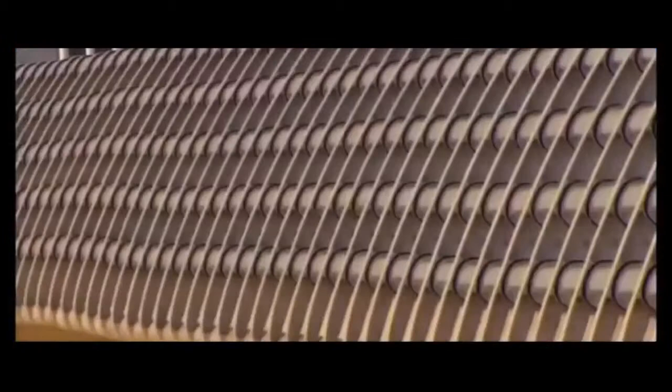This is the Millau Viaduct, the tallest bridge in the world. Its highest tower stretches a staggering 343 meters. So high, the bridge glides above the clouds. But this is a megastructure they said couldn't be built. When I've shown first the drawing of this bridge, they really thought I was crazy.

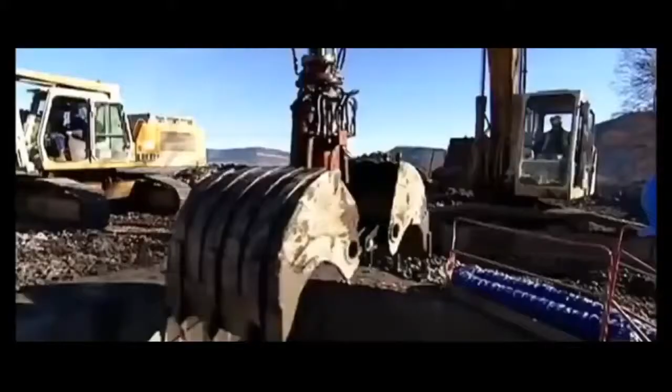The team attempting to build this amazing freeway in the sky had to survive landslides, fight winds gusting at 130 kilometers an hour, and weather massive storms as the bridge simply hung in the balance. It's a bridge that pushes the boundaries of engineering to the limits, and then beyond.

Imagine building a series of Eiffel Towers, then slinging a 4-lane highway between them, all the way across one of the deepest valleys in France. Impossible though it sounds, that pretty much describes the building of the Millau Viaduct.

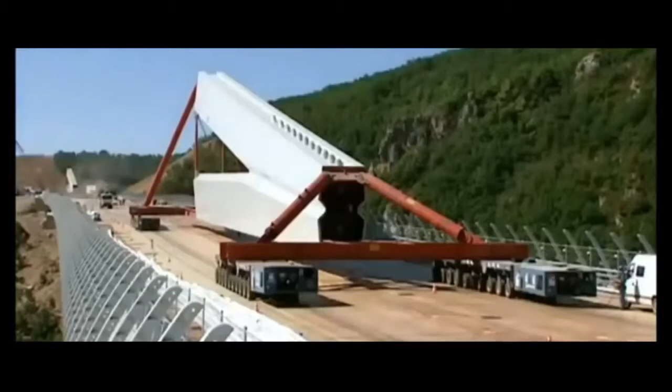From the start, the construction team faced 3 daunting challenges. 1. Build the tallest bridge piers in the world. 2. Put a 36,000-ton freeway on top of them. And 3. Erect 7 steel pylons, each weighing 700 tons. And what's more, they had to do this hundreds of meters above solid ground. So high that if you were on top of the Eiffel Tower, you'd still be looking up at this awesome bridge.

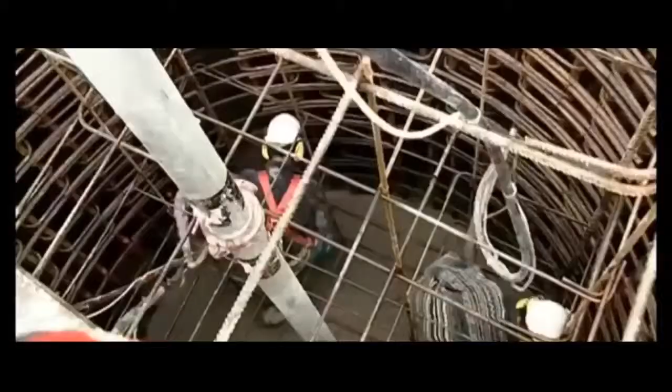October 2001, the team break ground. They're required to build a bridge that'll last for 120 years. And to win the contract, the teams promised to build it in record time, less than 4 years. By comparison, the world's longest suspension bridge, the Akashi Kaikyo in Japan, took a full 10 years to build. To up the ante, any delay will cost them $30,000 a day in penalties.

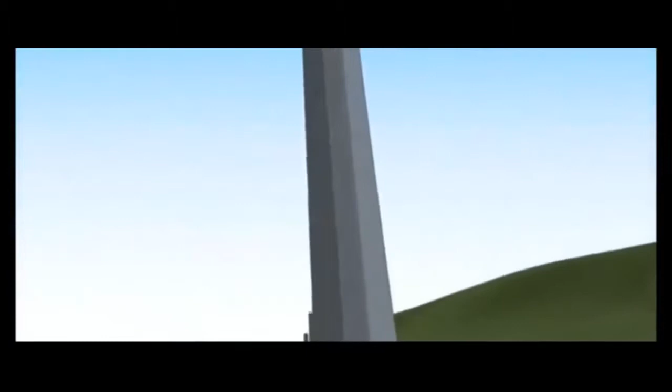There are 7 piers that are numbered from the northern end of the valley. Number 1 will pose problems because of the steep slope. Number 2 will be the biggest challenge since it's the tallest. Crossing the river, number 3 is not much shorter. Then 4, 5, 6, and 7 climb the gentler slope to the south.

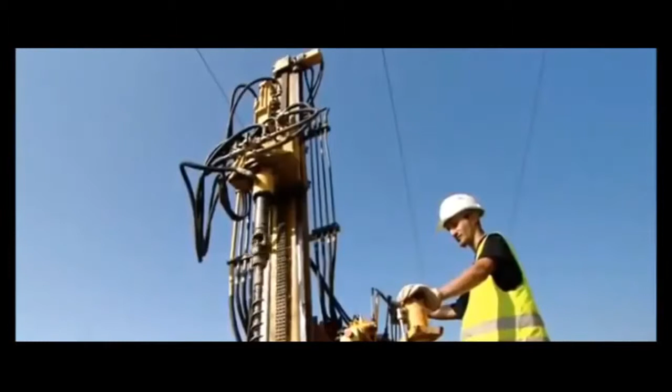To begin, the team had to bury the foundations deep in the bedrock in order to support the enormous weight the bridge will place on them. But the forces of nature were stacked against them. Geologists have warned of the risks posed by the region's fractured limestone. The rock is full of cavities that are essential to the local cheese economy. These cave systems, close to Millau, are home to a unique bacteria responsible for the blue mold in the world-famous Roquefort cheese. But what's perfect for cheese could be disastrous for a megastructure.

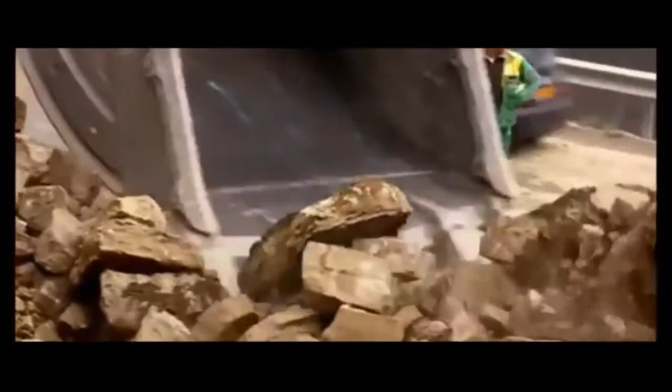The geologist's diagnosis spelt one thing: landslides. This kind of catastrophe could jeopardize the entire project. Despite the warnings, building went ahead as planned. Then, well into construction, as predicted, a dramatic storm causes a landslide. 4,000 cubic meters of rock collapse around Pier 1. Fortunately, the fallen rock doesn't damage the pier, but the warning is clear. They're forced to divert precious manpower and equipment to stabilize the slope and prevent a repeat collapse.

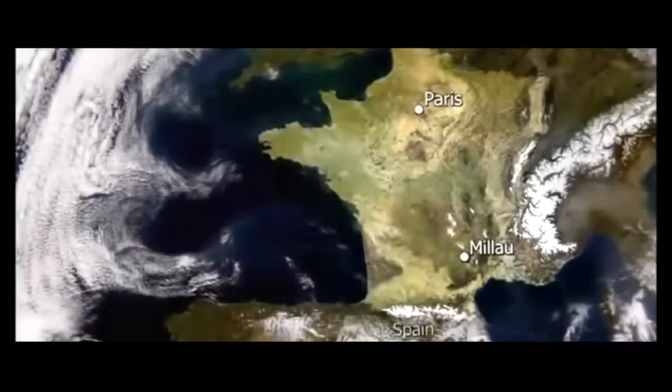So if the area is prone to landslides, why did they build the world's tallest bridge here in the first place? The answer is simple. In the 1980s, France built a freeway linking Paris directly with Spain. This major artery headed south across the French countryside, while from the Mediterranean, the freeway headed north, until they both hit one of the deepest valleys in France and stopped dead. Welcome to Millau, France's least favorite bottleneck.

The town of Millau is in the mountainous region of the Massif Central, one of the most tranquil parts of France. But in summer, this poor medieval town suffered traffic hell. The locals couldn't take it anymore. Neither could their mayor. It was terrible for our reputation. When you hear every day on the television and radio, avoid Millau, there's a traffic backup, a 5-hour wait in Millau.

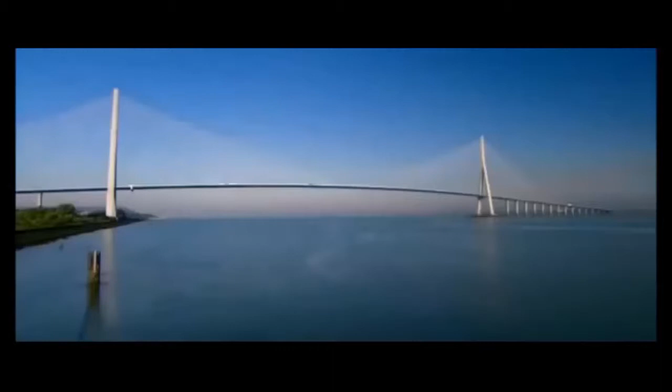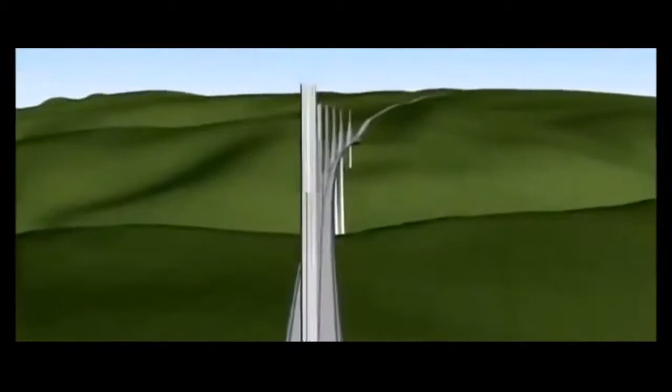The Millau Bridge would not only be the world's tallest, it would be unlike any bridge ever constructed. When I first showed the drawing of this bridge to the concerned authorities, they really thought I was crazy. Virlogeux's Normandy Bridge has 2 sets of cables supporting the deck. But he wanted to up the stakes for Millau by losing 1 row of cables, so the remaining line would be forced to do twice the work.

More dramatically, the 2.5-kilometer Millau Bridge, instead of having a single main span, needed a whole series of piers to support it across the valley. No bridge builders had ever attempted a multiple-span, single-line cable-stay bridge on this scale before.

The French authorities had a problem. Nervous about Virlogeux's groundbreaking scheme, they held a competition inviting other engineers and architects to compete with different designs. The winner, Lord Norman Foster, is one of the world's superstar architects. In Hong Kong, he built the world's largest airport terminal. In Barcelona, offices literally hang from a mast on his communications tower. This is a man who regularly contemplates the impossible and delivers.

You know, it's the challenges, and it's one challenge on top of another, on top of another. And with Millau, one of the biggest challenges was making it fit into the landscape, given it's just down the road from the famous Gorges du Tarn, France's equivalent of the Grand Canyon. How do you make something which has to be so immensely strong against the forces of nature look very gentle, very delicate? How do you weave something on that scale into the most unbelievable landscape?

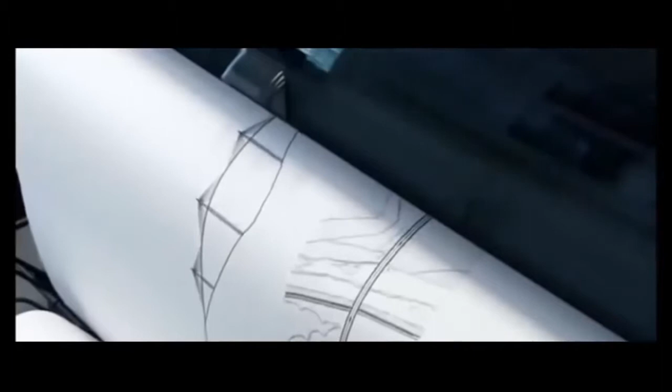Ironically, Foster's answer was to take Virlogeux's pioneering scheme, then push it one stage further. He turned an elegant piece of engineering into a delicate work of art by boldly cutting out 2 of the 9 original piers and seriously slimming down the remaining piers and road deck. Foster wanted the bridge to appear as delicate as a butterfly, but this butterfly has to support the weight of 5 Eiffel Towers in gale-force winds hundreds of meters above the River Tarn. Getting the design wrong would be a disaster.

Then, with Millau still on the drawing board, Foster's record as a bridge builder suffered a major setback. His Millennium Bridge in London is actually another record-breaking structure, the lowest profile suspension bridge in the world. But when this footbridge opened to the public in June 2000, it was a public relations disaster. Crowds walking over it set up a resonant frequency, and the bridge began to sway. As people adjusted their step to the small initial wobble, the effect was magnified.

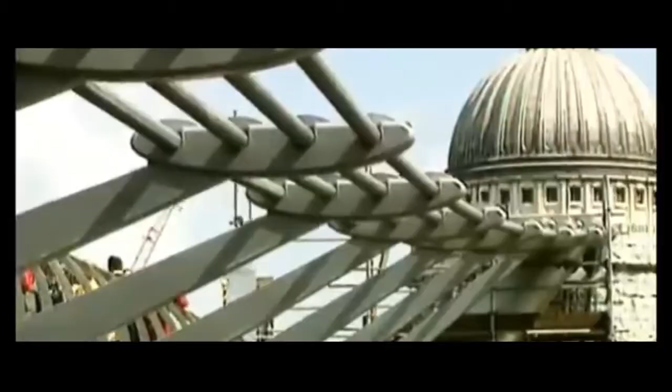Though it didn't threaten the structure, the swinging motion became so dramatic, the authorities closed the bridge for a refit that took 1.5 years and ended up costing over $8 million. It was a bad omen for the Millau Bridge, where construction was soon to begin. And at 15 times the height, a design flaw would be a catastrophe.

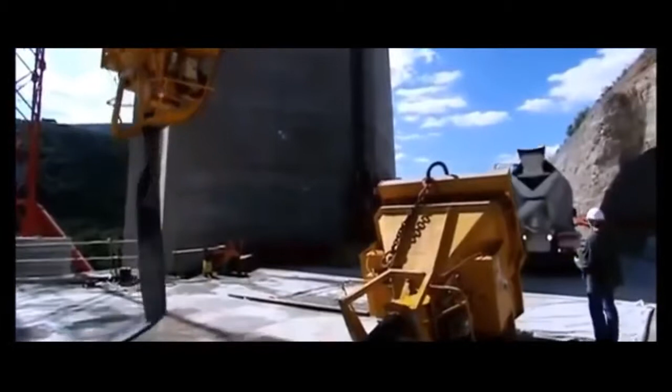December 2001, France's Millau Viaduct, the tallest bridge in the world, is under construction. Everything about this project is supersized. It'll need 200,000 tons of concrete, so much that the team have to build a concrete factory on site. But there's nothing straightforward about this concrete. The formula must be just right. It needs structural strength to support the massive loads it'll have to bear. But it can't set too quickly, as it has to be hoisted into position and poured hundreds of meters in the air. And it needs to be just the right color to suit Norman Foster's vision.

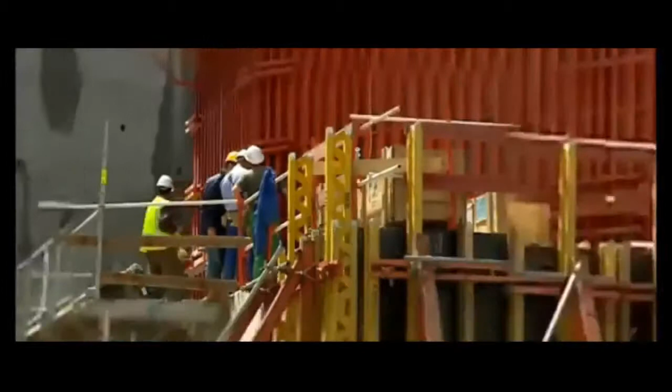In fact, the architect's vision has created a headache for the construction team. He's designed each pier as a complicated geometric shape, tapering the entire way up with vertical grooves set into them to create shadows. But what's just a line on paper for the architect was a major challenge to build. The enormous piers are built step by step by pouring concrete into a temporary mold.

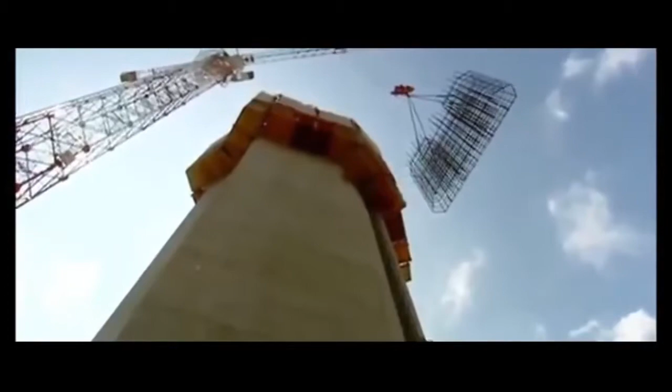To give the required strength, the molds are filled with a frame of steel reinforcing bars. In total, 16,000 tons of these steel bars are hoisted into place and secured. Laid end to end, they'd stretch the 4,000 kilometers from Millau all the way to Central Africa.

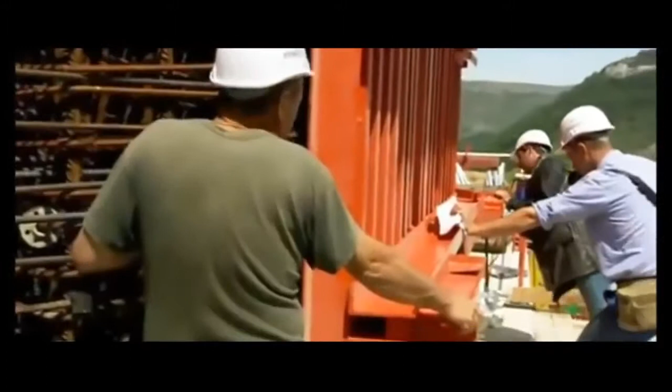The shape of each pier is seriously complicated. As a result, each time they remove the sections of red steel shuttering, they have to change the shape of the mold to fit the profile of the next 4-meter section. Manhandling these steel panels weighing up to 15 tons apiece is no picnic. And with the combined height of the 7 piers totaling well over a kilometer, they have to change the shape of the mold over 250 times.

Every 3 days, each team on each pier went through this whole cycle. Then they repeated the process. But it was a race against time, with a permanent threat of delay. Keeping the entire build on time and to budget was the daunting responsibility of one man, Jean-Pierre Martin.

If instead of 3 days we took 4, imagine that multiplied by the number of castings. We'd end up with a 3 or 6 month delay. With a penalty of nearly $1 million a month, this isn't something Martin wanted to contemplate. And this schedule wasn't his only headache.

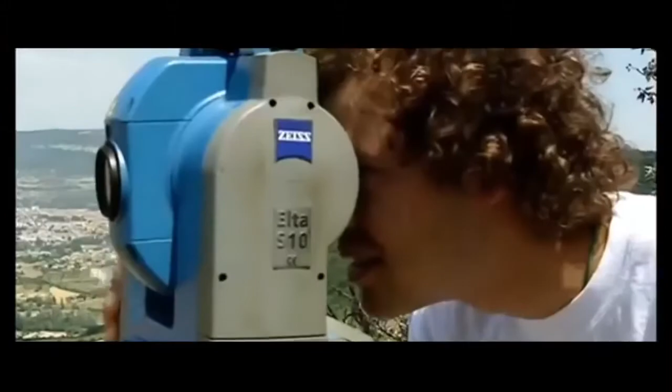You have to be pinpoint accurate when you're building the tallest bridge piers in the world. Get it wrong, and the bridge simply won't fit together. Just 10 centimeters out, about a hand's width on each 4-meter section, and the tallest pier could be 6 meters off at the top, the width of a jumbo jet fuselage.

Each team was aiming for a specific point in the sky. For Pier 2, this was exactly 245 meters above the ground, 546 meters from the north side, and 1,914 meters from the southern end. There was no room for error.

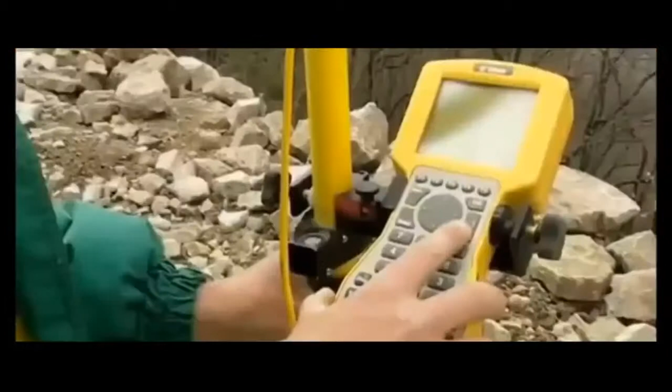The only chance they had to get it right was with GPS, accurate to within 4 millimeters. Using signals from multiple satellites, the team could pinpoint their position and make sure they're on target for that critical point in the sky they needed to hit.

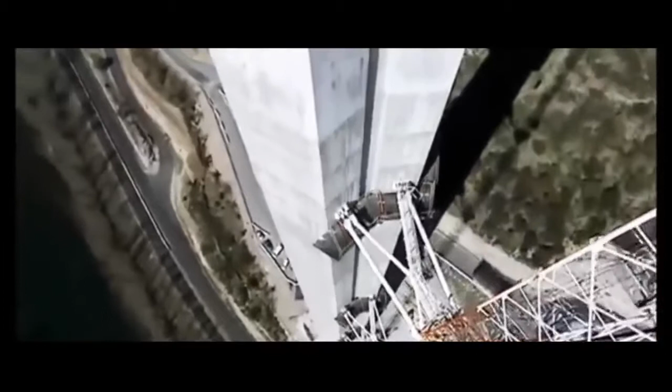Month after month, the piers climbed higher. Finally, by November 2003, they reached their full height. At 245 meters, Pier 2 becomes the highest bridge pier in the world. But is this record-breaking pillar where it's supposed to be? Amazingly, it's dead on target, to within 2 centimeters.

Champagne corks pop. It's time for a major celebration. Against all the odds, they were 1 month ahead of schedule, but the team couldn't afford to relax. The next stage of the project would be the most difficult part of the build.

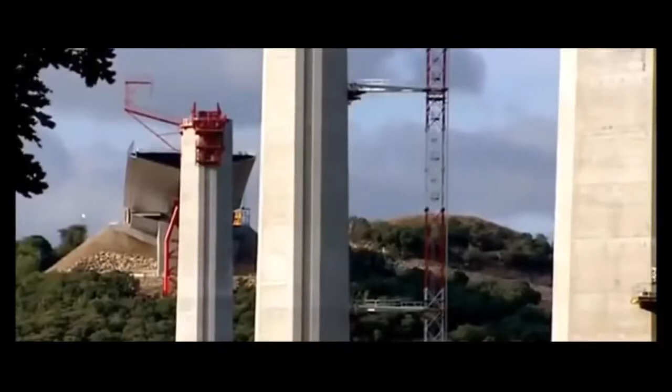Phase 2 of building the world's tallest bridge involved putting a 2.5-kilometer roadway weighing 36,000 tons on top of the piers, a full 270 meters above the River Tarn. Bridge builders know danger comes with the territory, but working at these heights can be lethal.

More than 34 died constructing New York's Brooklyn Bridge. 35 died in 1970 on the Westgate Bridge in Melbourne, Australia. And 1 year later, 13 workers were killed when the Koblenz Bridge in Germany collapsed into the Rhine.

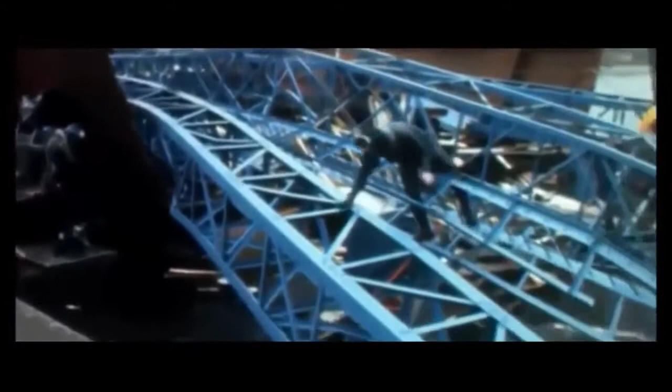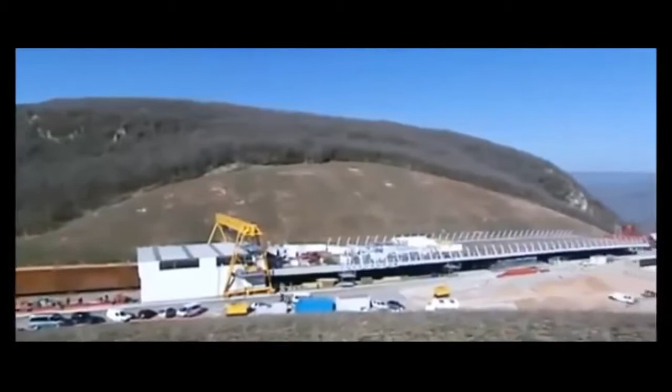With these fatalities in mind, the team decided to fabricate the entire road deck on the safety of solid ground. This meant building it in steel, which in theory would be much safer than lifting vast concrete sections hundreds of meters into position. There's only one problem with this plan. No one had ever put a road deck on piers anything like this height before, let alone over a 2.5-kilometer span.

In the end, only one steel manufacturer had the courage to take on this colossal challenge. Eiffel, the steel firm set up by the great French engineer. Eiffel built what was once the tallest bridge in the world, the Garabit Viaduct in southern France, before getting round to the framing for New York's Statue of Liberty and, of course, his signature tower in Paris.

But despite the company's experience, Eiffel's director, Marc Buonomo, knew he was taking a serious risk. It was a gamble for the company, because if there had been a mistake, if it hadn't worked, it would have been the whole company.

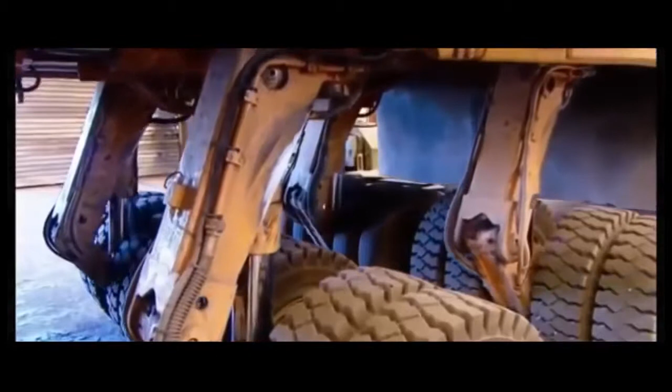They fabricated the massive sections that would make up the road deck in the company's steel factories. This immense jigsaw puzzle involved manufacturing 2,200 separate sections, weighing up to 90 tons, and some of them 22 meters long. Their accuracy is measured with a laser to within a fraction of a millimeter.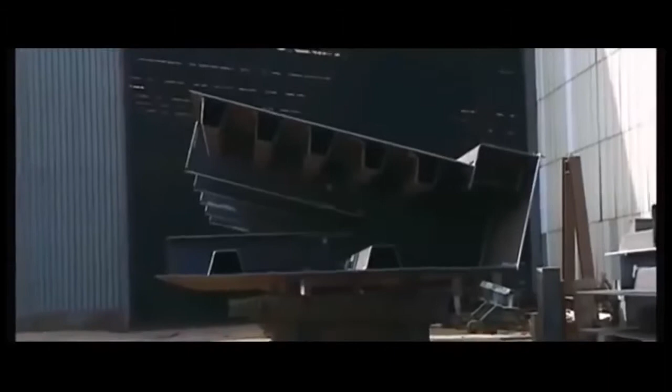The huge square tubes are the central spine that should make the deck rigid. The triangular side panels will be welded on either side to create the width for a 4-lane highway. To meet the punishing schedule, Buonomo automated the manufacturing with a 2-headed welding robot and a plasma cutting machine.

Each cutting pattern or template is programmed into the computer. Then the machine automatically blazes its way through the steel. The torch reaches a scorching 28,000 degrees centigrade. That's 5 times the temperature of the Earth's inner core.

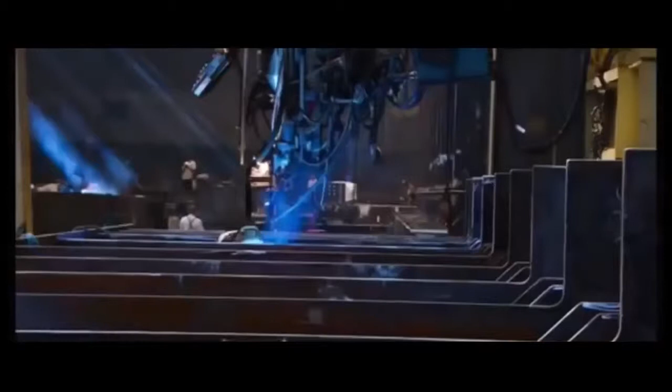But cutting and welding was the easy part. The hard part was getting these monster sections the hundreds of kilometers from the factories to Millau. The routes had to be planned with precision to avoid major damage. The police coordinated safety and clearances.

Even with that level of preparation, some obstacles felt as if they're cutting it just too close for comfort. And this was no one-off event. To build the viaduct took over 2,000 of these extraordinary road convoys.

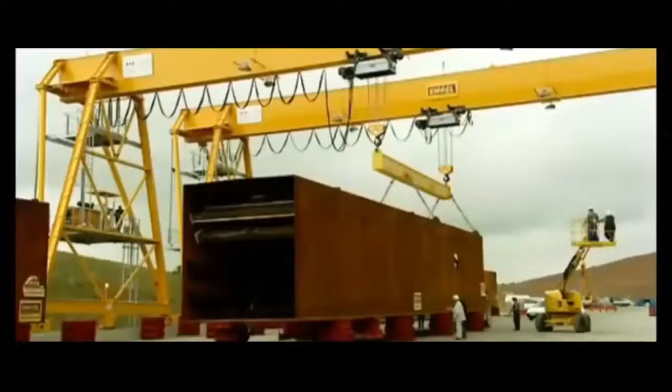The components arrived at assembly plants set up, one on either side of the valley. Here, the pieces of a massive jigsaw puzzle were welded together to form the 2 halves of the deck. But getting these 2 halves to span the valley on top of the world's tallest bridge piers would be a major challenge. They'd be the first team to put a road deck on a pier taller than an 80-story skyscraper.

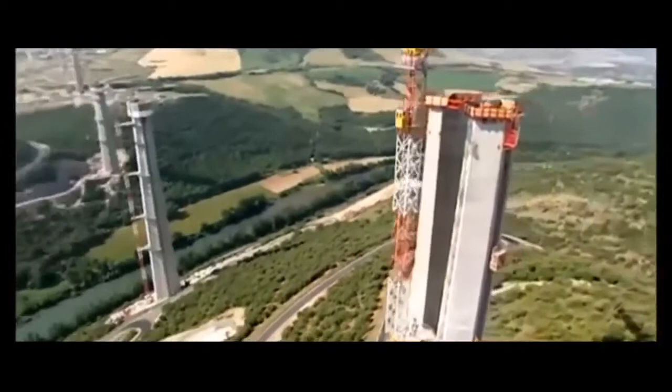And pushing bridge building beyond anything attempted before, they planned to slide the entire 2.5-kilometer road deck over in 2 colossal pieces. The bridge's chief engineer, Jean-Marie Cremer, was one of the few people who believed it could be done. All the engineers who know this method, who were in the know, didn't believe it was possible. If the team had got their calculations wrong, the entire structure could collapse into the valley.

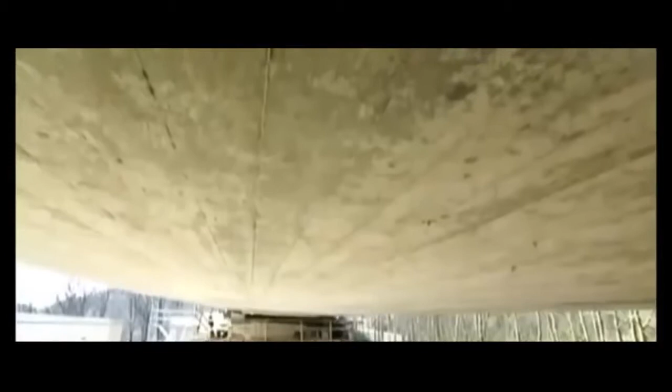We found a solution for the construction, which was to launch the bridge from the 2 sides. One part on the Larzac Plateau, one on the Rouge Plateau. And to push them from the 2 sides and to make them come and meet here above the River Tarn. Smaller bridges use a similar technique. A powerful set of hydraulic rams literally pumps the deck from one side to the other.

But Millau would be the longest launch ever attempted over the highest piers in the world, and the results could spell disaster. The deck is so slender, it would bend and collapse if it were pushed out over the 342-meter spans between each pier. The furthest anyone's previously managed is less than half that distance. The first part of the solution was simple. Fit a pylon so its cables support the front of the deck as it goes out over the valley. Then construct temporary steel support towers that halve the spans to a more manageable 171 meters.

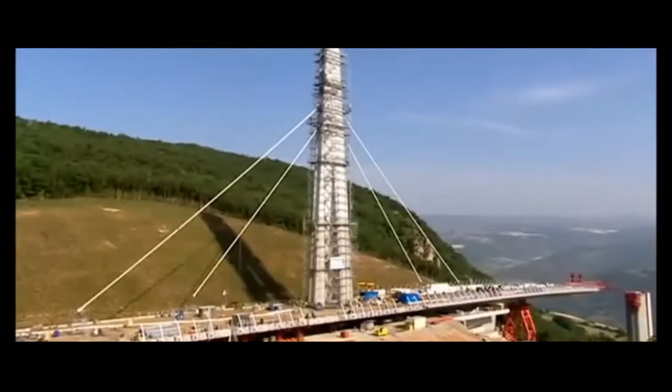These steel towers were a construction feat in themselves. The largest, over 170 meters high, is the tallest ever built, and they needed to carry a massive load. 7,000 tons as the leading edge of the deck, together with the first 90-meter pylon slide over. And simply pushing this enormous weight over the top of the vulnerable piers would bring them crashing to the ground. This was the nightmare scenario. If we'd done a conventional launch, we would have knocked the piers over like the pins in a bowling alley.

Someone needed to reinvent the way this type of bridge is built. And it's Marc Buonomo with Jean-Marie Cremer who came up with the breakthrough. The basic principle can be demonstrated with a heavy box and a wobbly table. With a normal launch, you knock over the piers. I want to advance the deck over the pier, but if I push the deck from here, I'd knock over the piers, because they're so tall. The idea is to install a launching system on top of the pier, and that way, if I push the deck, it has no effect on the stability of the piers, and the piers won't fall over.

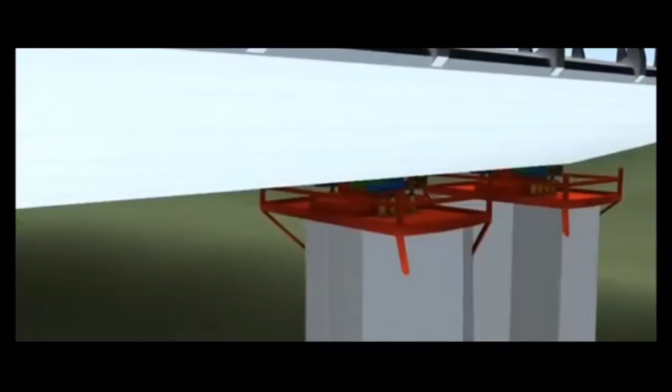The trick is to use a series of these launching systems to jack up the deck and inch it forward. Each system uses two wedge-shaped blocks under each side of the deck. The upper wedge is pulled forward by a hydraulic ram. It slides up the slope of the lower wedge at the same time, lifting the deck from its supports and advancing it 600 millimeters. The lower wedge then retracts, dropping the deck onto its supports. The upper wedge returns to its original position, and the whole cycle begins again.

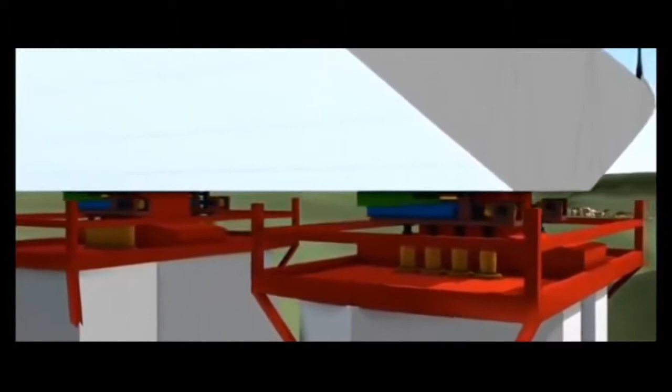4 of these clever devices are placed on each pier, all programmed to work at exactly the same time. The result is that together, they pick up the entire roadway and shunt it forward. But if one fails or gets out of step, it could spell disaster. The force could push the bridge piers apart till they collapse. When you're up there and you see Millau 300 meters below you, you ask yourself, was this a good idea? The future of the entire project was now hanging on a prototype, and it had never been tested.

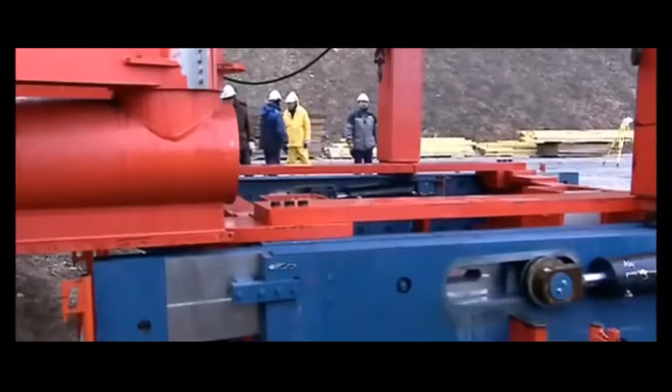It's the morning of February 26, 2003. Do or die day for the world's tallest bridge. Everything is about to be put to the test. The flexibility of the deck, the strength of the temporary piers, and critically, the pioneering hydraulic ram system. Even Buonomo, the man in charge of the launch, had his doubts. As it had never been done before, I have to tell you, I had fears that it wouldn't work.

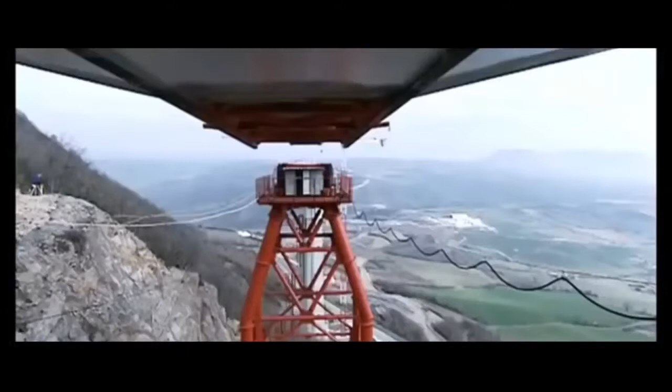The pumps kick in, the pistons start to push, and the deck begins its huge journey across the valley. The moment I heard the motors start, I put my finger on the deck, and I could feel my finger move. Every 4 minutes, the deck advanced 600 millimeters across the valley. Surveyors tracked its progress. But it was still a nail-biting time as they watched the unsupported deck crossing the void.

Eventually, the deck reached the safety of the first pier. 204 meters down, only 2,256 to go. The launching system seemed to be working as planned. The engineers were feeling optimistic.

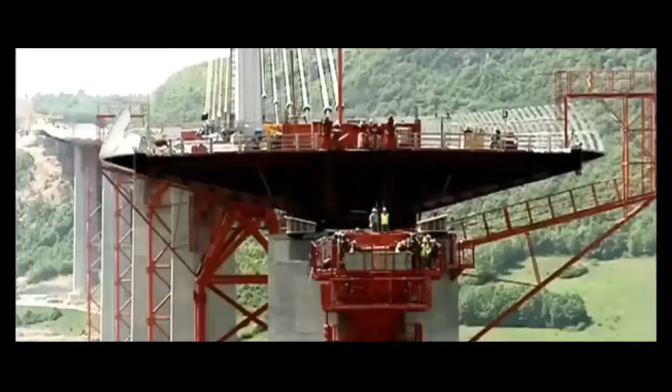But as the deck advances into space, it'll become more vulnerable to the wind, which can reach 130 kilometers an hour. Unfortunately, the road deck has the shape of an upside-down airplane wing, and the team's greatest fear is that this wing could simply take off.

The engineers kept a close eye on the wind and weather conditions. When they were satisfied there was a 3-day weather window and the wind wouldn't exceed 85 kilometers an hour, they'd give the construction team the go-ahead, and the deck launch could continue. The reason for this precaution is simple. Strong winds can literally tear a bridge apart.

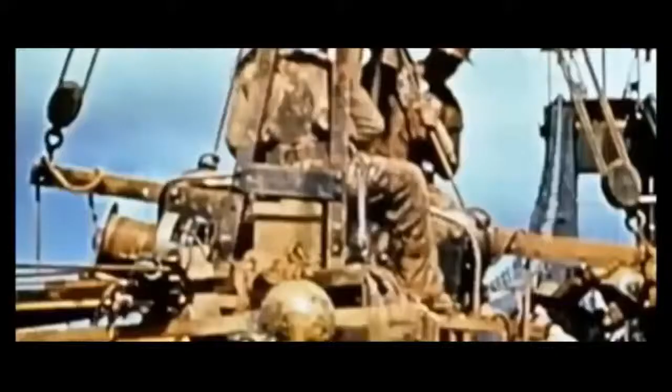In 1940, Washington State built a suspension bridge across the Tacoma Narrows in the US Northwest. It opened with a grand ceremony on July the 1st. But the celebrations were short-lived. The bridge had a major problem: the wind. Girders beneath the deck, designed to make the bridge rigid, actually blocked the wind, causing the roadway to ripple alarmingly. Locals soon dubbed it Galloping Gertie.

On the 7th of November, with the wind less than 70 kilometers an hour, the bridge begins to twist violently. At 11 a.m., time runs out for Galloping Gertie. The wind sends the bridge crashing into the river. Wind tunnel testing is now standard procedure as a direct result of Galloping Gertie.

For the Millau Bridge, they analyzed the wind in the Tarn Valley over 18 months, then recreated those conditions in the wind tunnel. Wind engineer Olivier Flamand was shocked by the results. The average wind speed was relatively low, but because there's such strong turbulence, it created very fast peak winds. The rugged terrain creates serious turbulence at the height of the road deck. Winds peak at 130 kilometers per hour. That's hurricane force.

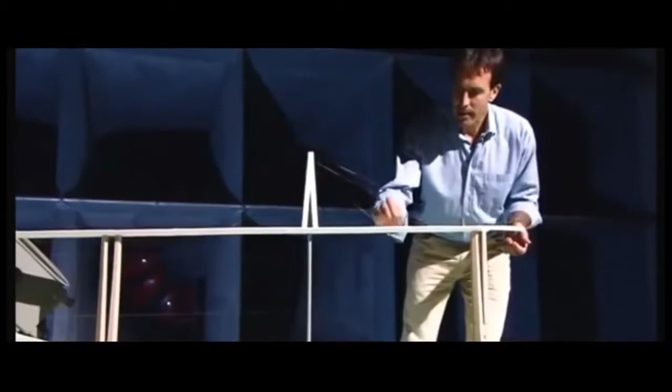They tested every aspect of the bridge to analyze the risks: piers, pylons, and critically the deck. But it's not just the aerodynamics of the finished bridge. They needed to find out how it would behave when it was most at risk, during the launching of the deck. Olivier and his team reached a chilling conclusion. The winds they've measured are strong enough to blow the unsecured deck off its supports and send it crashing hundreds of feet to the valley floor.

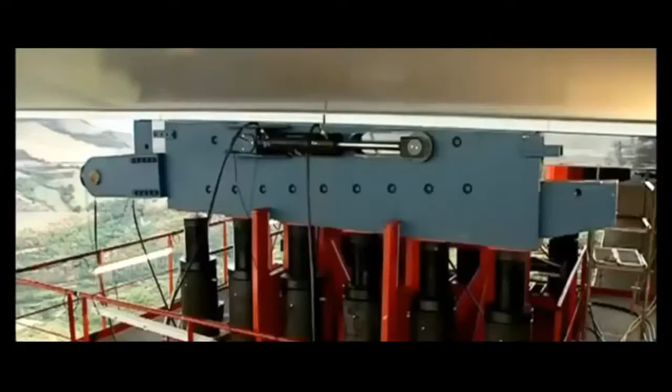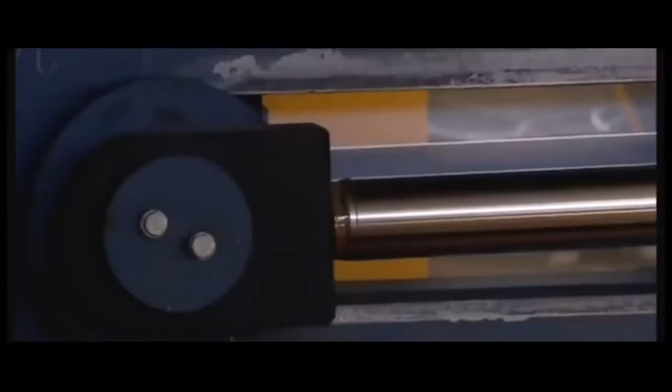And then the nightmare began. On the 22nd of August 2003, 6 months into the deck launch, one of the launch systems failed, leaving the deck hanging in the wind. To make matters worse, the weathermen were predicting storms. So far, these massive pumping machines had worked perfectly. But the fact is they were prototypes, and due to the frantic schedule, they'd never been tested.

The problem was that the non-stick Teflon between the sliding surfaces had ripped, and the friction generated was too much for the hydraulic rams to push against. Unfortunately, no one had planned on replacing parts of this monster machine mid-launch on the top of a massive concrete pillar. This was very bad news for the man who staked his reputation on this system. It was maximum stress, like poison in your mouth. You don't forget that.

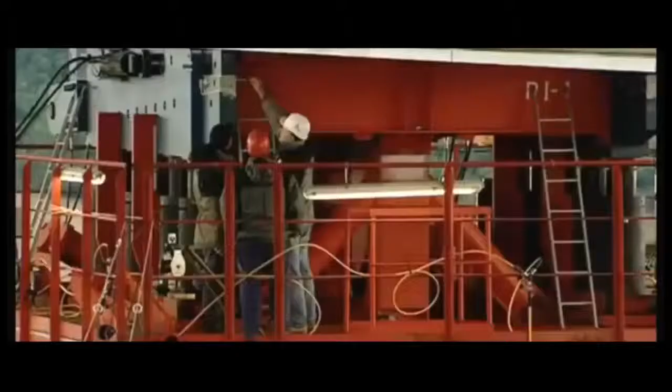Re-examining their calculations, they realized the cause of the problem. It underestimated the forces between sliding surfaces, but they wouldn't be able to repair it without the necessary spare parts. The clock was ticking, and Marc Buonomo needed a solution fast. When Apollo 13 came back with that incident, the NASA engineers requested they did the inventory of everything there was on board to know how to fix it.

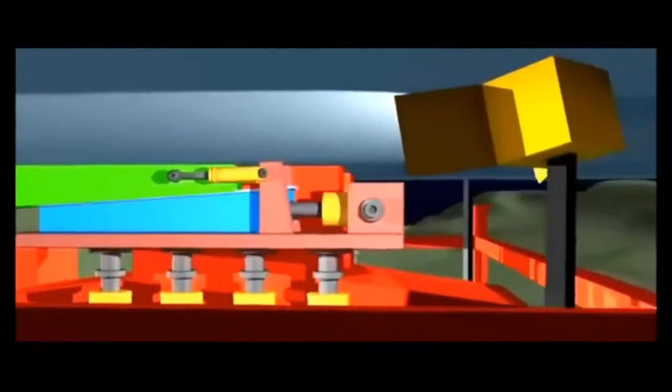The Millau team did an inventory. They realized that the other launching machines, not yet being used, could be stripped to provide the new Teflon surfaces they needed. Working all through the night, the team extended the access platform. This allowed them to take out the 5-meter-long, 2-ton steel wedges, replace the Teflon, and reassemble the launching machine. By 8 a.m. the next morning, it was ready to resume the launch.

The rest of the week, the predicted storms arrived, and another set of launching machines wore out. So when the deck finally made it to the safety of the next pier, the team breathed a major sigh of relief. You don't forget that. I won't forget that for 4 hours I was really scared.

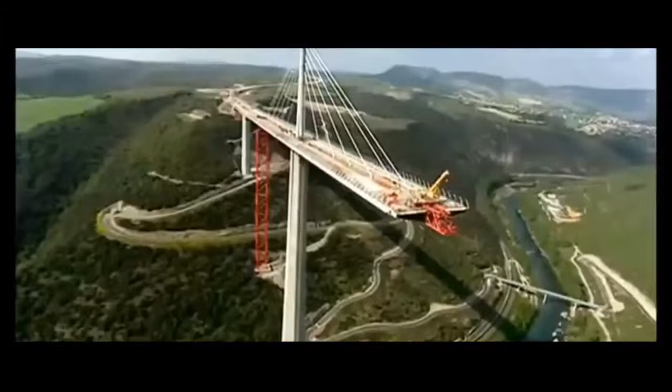The two decks continued their journey across the valley. Day after day, week after week for a full 14 months, they approached each other, millimeter by millimeter. By May 2004, they'd reached a critical phase. From the northern end, the shorter deck had traveled 717 meters into space to reach its final resting place. From the south, the longer deck extended over 1.5 kilometers. Only the section over the river, the one point where it was impossible to erect a temporary pier, divided them.

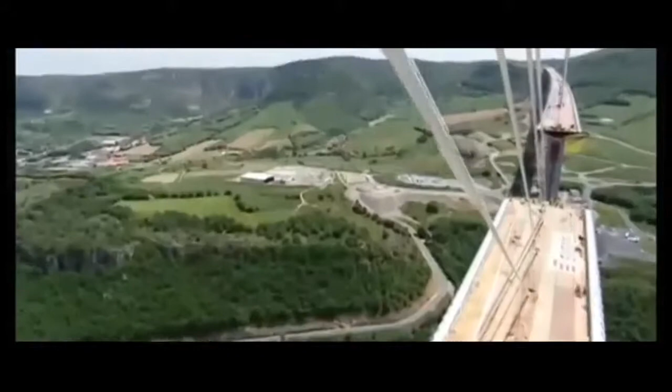But would they meet as planned? If they've got their calculations wrong, they'll have built the biggest white elephant in Europe. Even the man behind the whole project had his doubts. I was not convinced at all that the two parts of the deck could meet exactly with a perfect geometry. The odds were against them. Calculating such a feat so precisely is a Herculean task.

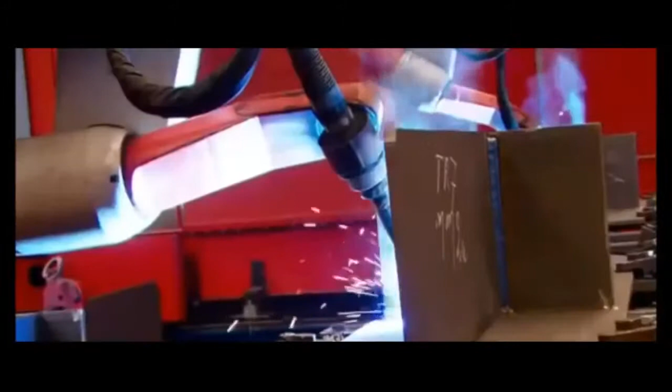Firstly, the two starting points on the northern and southern slopes of the valley are at different heights. Secondly, the bridge has a subtle curve to it. As a result, each steel panel which makes up the road deck had to be cut and welded with extreme precision. It would be an engineering triumph if they got these two sloping curved decks to meet as required.

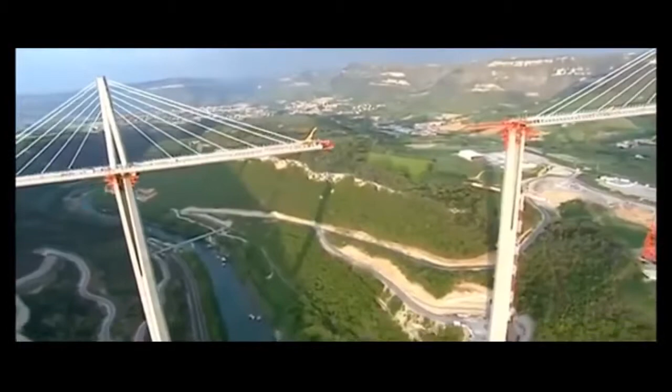The team checked the weather reports. With the wind inside safety limits, they gave the go-ahead for the final push. The rams began to drive the deck's leading edge off the safety of Pier 3 towards its destination. At this point, a total of 21 launching systems needed to move at exactly the same moment to avoid disaster. If anything were to go wrong now, the man responsible would be Marc Buonomo.

Everyone asked me, how can you be sure that it will go straight? So to be sure that they were going to the right place, I had a GPS put on the front, so I could see the gap between the theoretical and the real position. Over the next 2 days and nights, the deck advances 600 millimeters at a time towards its final resting place.

The world's media are watching the critical meeting of the decks, and to add to the pressure, the French Prime Minister is due to drop in to celebrate the event. The deck pushes forward, now with only centimeters separating the two sections. A magnum of champagne is hung between them to mark the moment.

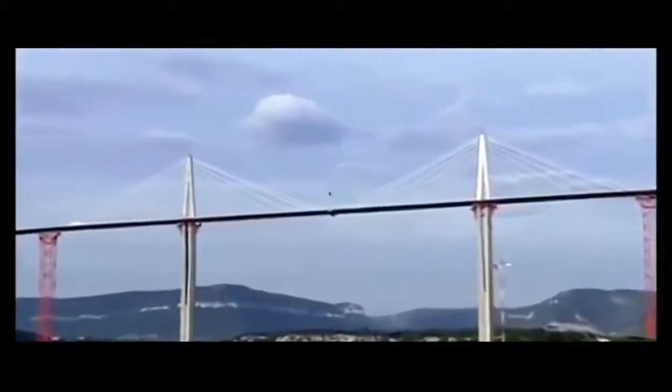At last, union. The two massive steel decks have traveled high over this valley, a total of 2.5 kilometers, and when they check, they're aligned to within 1 centimeter. That's accurate to within 99.9999%. All the measuring, all the calculations have paid off. They've nailed it.

The meeting of the decks was a special moment. News reports traveled round the world, and in Salzburg, Austria, they reached Felix Baumgartner, aka Felix the Conqueror. Felix has made a career base jumping from some of the tallest structures on the planet, and within 24 hours, he'd driven to Millau and was calculating the logistics for the jump, factoring in his two main aims, to avoid arrest and death.

Baumgartner waited for darkness before arriving on site. He found his way to the base of Pier 2, then climbed an access ladder the full 245 meters to the top. He entered the steel road deck and found a place to hide until daybreak. He had to remain concealed until the sun was high enough for his cameramen to record his world record attempt.

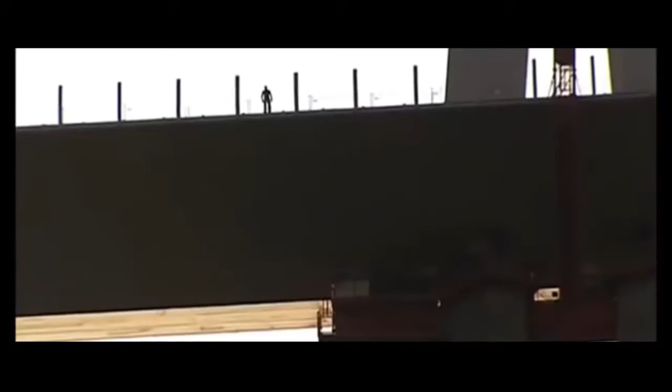At 7 a.m. the following morning, Felix the Conqueror emerged. He took a cool backward flip off the tallest bridge in the world and entered the record books. The tallest bridge in the world, 250 meters. I did it. And having evaded death, he made sure he's not caught by the police.

The decks have been joined, and the team have reached the final phase of the project. But there was still a race to meet the schedule, and their problems weren't over yet. Everyone could see the dramatic undulations in the flexible steel deck. Even some hardened bridge builders wondered about its structural integrity. It was a huge surprise for everyone. All the engineers said, we knew steel was flexible, but not that flexible.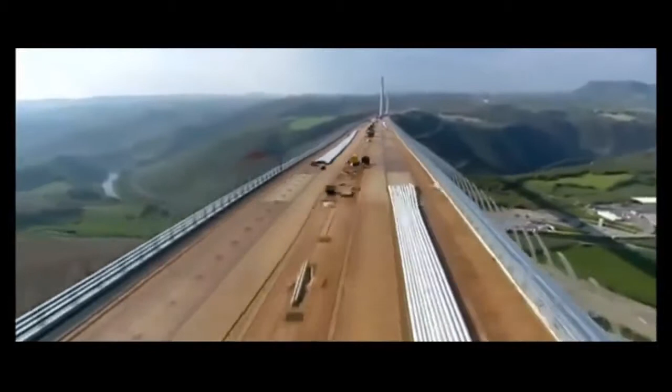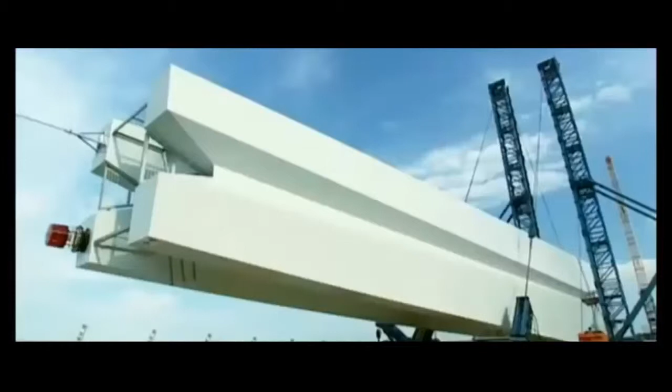The team were relying on the pylons and cables to pull the deck straight. Each massive pylon is 90 meters high and weighs 700 tons, the equivalent of 85 London buses. Placing them in position on the slender deck, high above the valley floor, would go beyond anything ever attempted. Once again, Marc Buonomo had a plan. You know, the first people to make vertical pylons were the Egyptians. Buonomo adapted a technique used in ancient Egypt to erect obelisks in the sands.

On top of the road deck, the team put up two enormous steel towers, both of them secured by cables and equipped with a hydraulic system capable of raising 1,000 tons. The 700-ton pylon is then lifted by the hydraulics. As it rises, it pivots little by little until it's vertical. It's then lowered safely onto its anchorage point. Buonomo's 4,000-year-old technique worked to perfection.

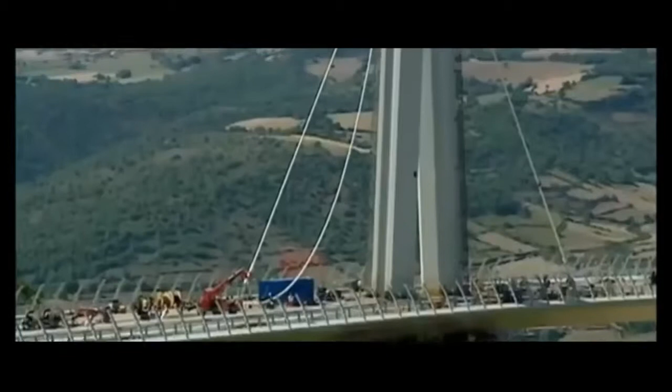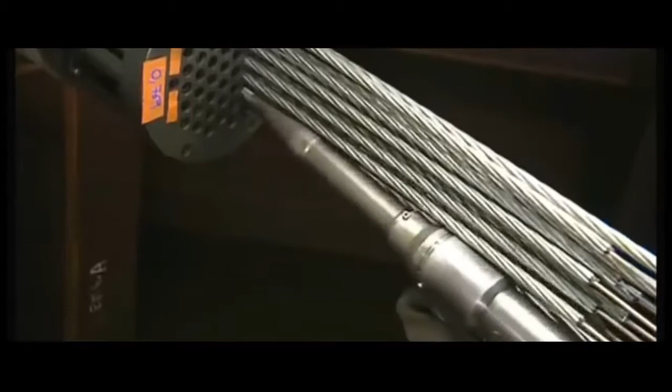With all 7 pylons in place, the team could attach the cable stays that would straighten the rippling deck and give it the strength to cope with full traffic loads. They hope. The weight of the roadway is now over 40,000 tons, the equivalent of a cruise ship, and the 154 cable stays should prevent it from sagging or collapsing. The strongest stays are made up of 91 individual steel strands and have a breaking strength of 2,500 tons, strong enough to hold back 25 jumbo jets, all at full throttle.

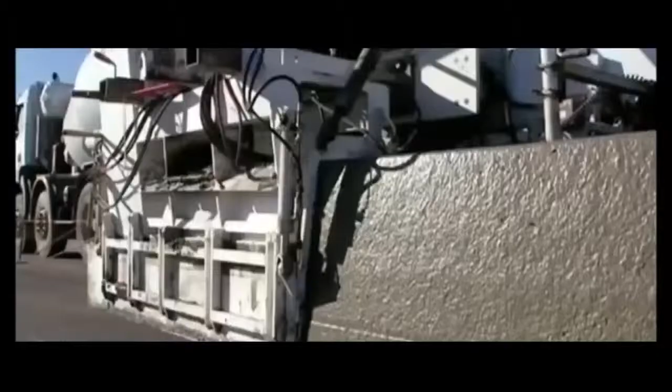As the cable stays are tensioned, true to plan, the ripples in the road deck are pulled straight. Over the 2.5-kilometer deck, the ripples are now no larger than the size of a thumb. They're finally on the home straight. The road surface goes on, adding a further 10,000 tons to the load. That's like driving 153 battle tanks onto the deck. But before it could open to the public, the team needed to know the bridge is safe. It would have to pass one crucial test.

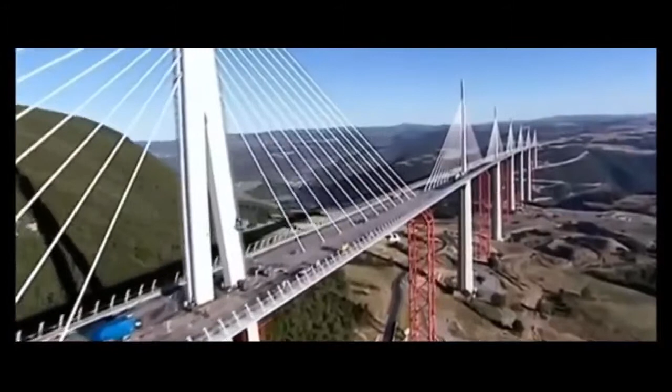After 3 years, the construction team building France's Millau Viaduct, the world's tallest bridge, are about to find out if they got their calculations right. On a single-span cable-stay bridge like the Normandy Bridge, a large load on the main section is no problem because the cables are attached to solid ground and can't give. On the Millau Viaduct, with its 8 spans, the cables are attached to the deck of the adjacent sections. A load on one section will cause it to drop, pulling the stays down. As the pylons lean in, the matching stays are pulled upwards, lifting the neighboring decks and causing a dangerous rippling effect.

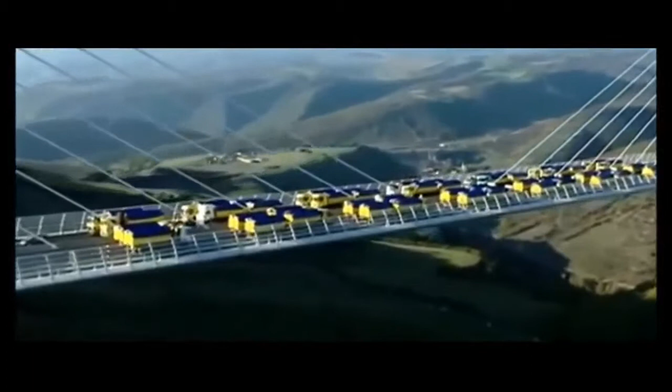It's right now the team put their bridge to the test. These 28 trucks have a combined weight of over 900 tons. They are now positioned in the critical point, mid-span. The engineers hold their breath. Measurements are taken. The span bends just 26 centimeters. This is a triumph for the engineers. The bridge was designed to cope with more than double that.

4 weeks later, on December the 14th, 2004, President Jacques Chirac officially opened the Millau Bridge. A proud moment for the whole of France. Just over 3 years of construction have produced the tallest bridge in the world, designed to last at least 120 years. And against the odds, the project manager even brought the job in on time. But that's not what he's most proud about. What I remember, because on construction sites there are often accidents, is that we had no serious accidents, nothing more than a minor injury.

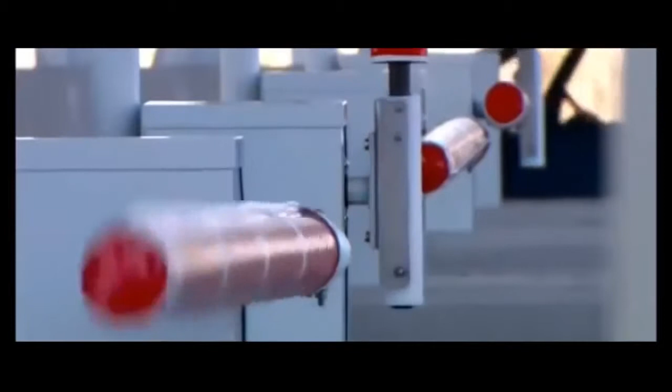As soon as it opened to the public, the bridge was an instant success. But the real test isn't till its first summer, when the French all take their annual vacation. No one ever expected anything like this. Numbers peaked at more than 50,000 vehicles a day. At over $7 per car, that's great news for the construction company, who are clawing back their $478 million investment in the project.

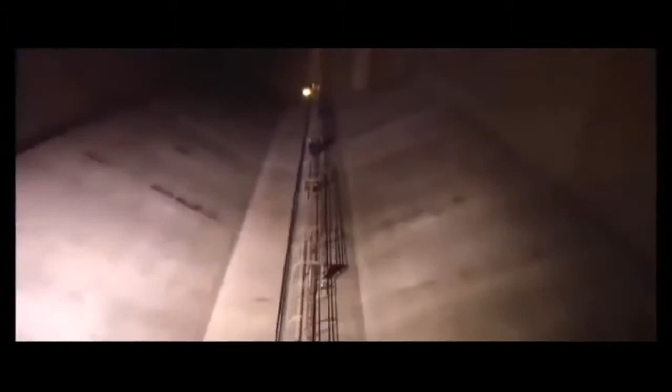This was an epic bridge to build, but it's just as epic to maintain. Thierry and Frank are assigned to P2, the world's tallest bridge pier. This structure is no solid concrete block. It's a series of vast hollow spaces. Their job today is to test the communication system and electric circuits on each of the 7 structural floors. This involves a 343-meter climb, going hand over hand up a ladder for the rest of the day. By dusk, when Thierry finally reaches the summit of the pylon, he may be exhausted, but there is a payoff. You get a fantastic view from here, a 360-degree panorama.

The tallest bridge in the world has become an icon. But this is creating problems no one had ever imagined. Locals have been taking over the bridge as a platform to get media attention for their causes. This crowd was hoping that driving sheep over this freeway in the sky would help them get more farming subsidies. Jose's job is to prevent this kind of incident from creating a danger, and on this bridge, the incidents keep on happening. An alarm triggered by a motion detection system means there's a stopped vehicle on the bridge. Immediately, Jose dispatches a colleague to deal with the situation. The last thing anyone wants is a multi-car pile-up on a 2.5-kilometer bridge, quarter of a kilometer in the sky.

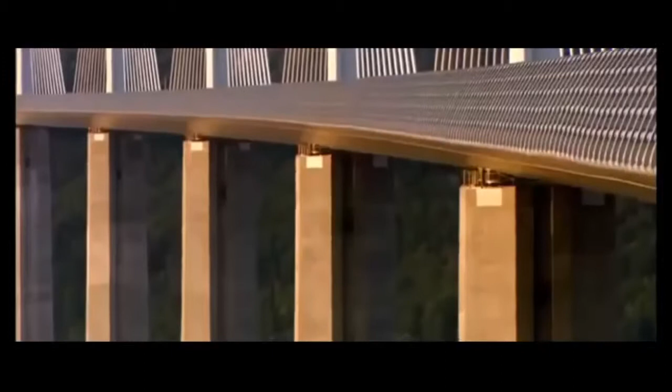Jose zooms in his camera to reveal the man has left his car and is sitting dangerously on the crash barrier. The driver's probably only broken down, but already one man who stopped climbed over the wind barrier and jumped to his death. Bruno intervenes. Thankfully, it's no more than an irresponsible photographer who's sent on his way.

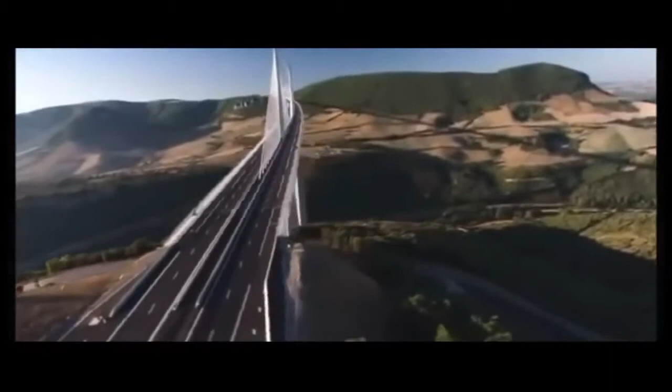You could say the Millau Bridge is a victim of its own success. It's definitely become a major tourist destination. 700,000 visitors in the first 9 months. Fortunately, most of them wait till they're off the bridge to take their photos. It's magnificent. I came 600 kilometers today to see the Millau Viaduct. There's only one thing to say. It's extraordinary. They're drawn because it's a world-beating structure, but also because it's incredibly beautiful, delicate and minimal. Not what you'd expect from a structure that's nearly a third taller than any other bridge on the planet.

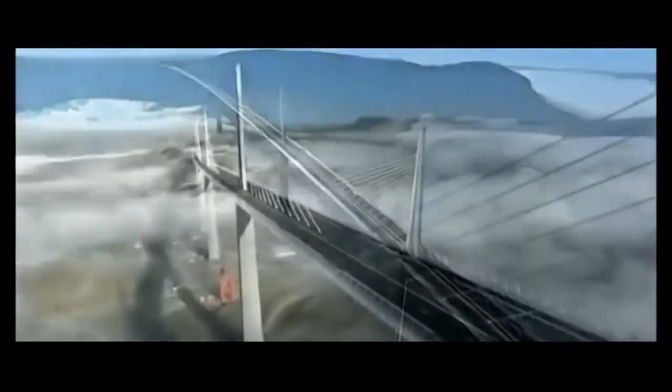And architect Lord Norman Foster's achieved his aim to give the driver the sensation of soaring. As you leave these plateaus, you do fly. You fly across this bridge. Literally, you are above the clouds. And the result certainly pleases the man who dreamt it all up. To see erected this bridge, which I imagined 15 years ago, it's something magic. This is the longest pure cable stay bridge in the world, the tallest roadway in the world, and of course at 343 meters, it is the tallest bridge ever constructed.